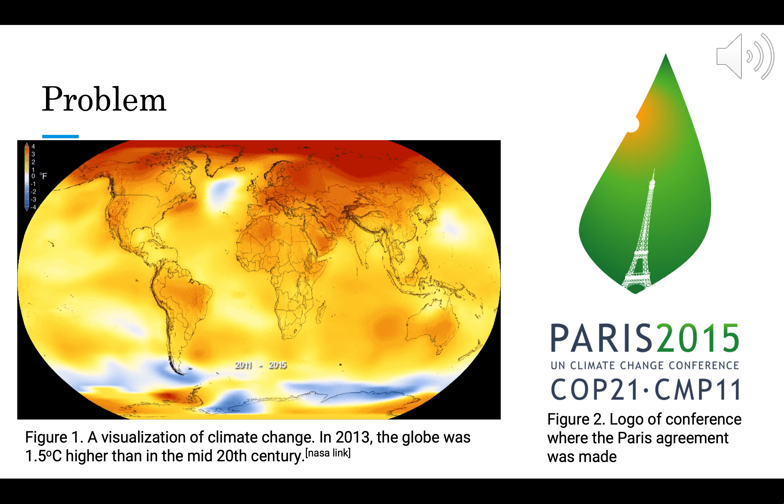Over the past century, humanity's net carbon dioxide output grew from 0 to 22 trillion kilograms per year. The massive growth of carbon dioxide output is due to the industrialization of society. This influx of CO2 is the main cause of global warming, acid rain, and the hole in the ozone. Our consumption of these fossil fuels far exceeds the natural production of these fuels, so eventually they will run out.

According to Shafi and Topal, the majority of fossil fuels will run out by 2042, and coal will only be available until 2112. At the 2015 UN Climate Change Conference, the Paris Agreement, negotiated between nations, set a goal to limit global warming to well below 2 degrees Celsius and reduce emissions to eventually reach zero emissions globally.

Hydrogen is a very appealing solution to alleviate our reliance on fossil fuels. It is a very versatile renewable energy source. Even the International Space Shuttle uses it as one of its main fuel sources. The direct use of hydrogen does not produce any carbon dioxide.

Recently, the hydrogen market has been expanding quite rapidly. The transportation industry has had growing interest in hydrogen-based vehicles. Toyota, Hyundai, and Honda all now produce fuel cell electric vehicles. Also, many fuel cell buses are being used in Europe, the US, and in Eastern Asia.

There are many different pathways to produce hydrogen, each requiring input of some form of energy to split molecules to produce hydrogen gas. Currently, the most common method in industry to produce hydrogen is natural gas steam reformation. It accounts for about 97% of worldwide hydrogen production. This is not a sustainable pathway because it produces carbon dioxide. Cleaner alternatives include biological and biomass methods, photoelectrolysis, and high temperature electrolysis, to name a few.

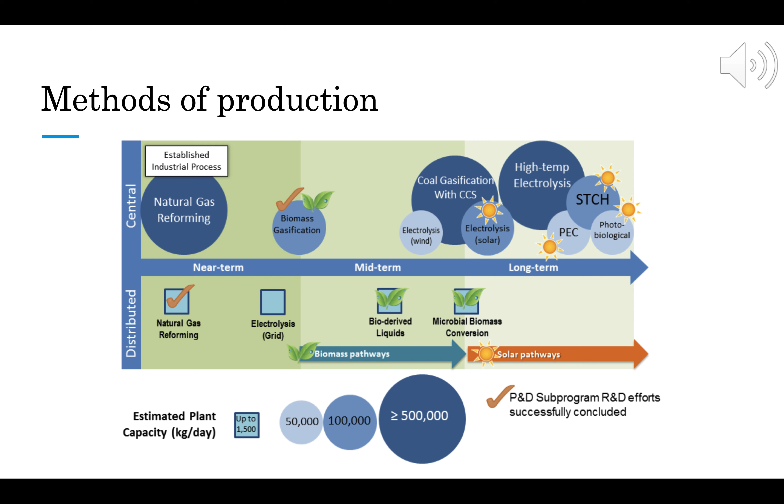Electrolysis is a technique that utilizes a current to decompose water into hydrogen and oxygen. It does this through an anode and a cathode, similar to a fuel cell. At the cathode of an electrolyzer, water uptakes the electrons and forms hydrogen gas and negatively charged oxygen ions. Oxygen diffuses through a solid membrane and reacts at the anode to form oxygen gas. There are many types of electrolyzers, but according to Back et al., oxide materials are best suited to be the electrodes. Although they are not as efficient, they are inexpensive and show great corrosive resistance.

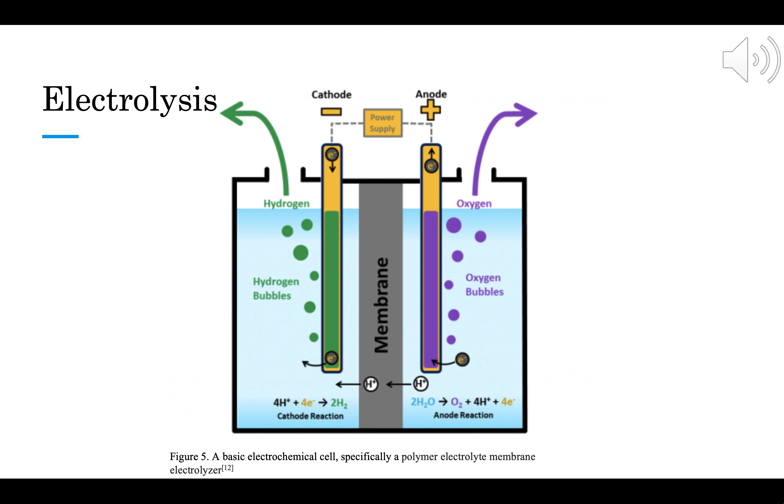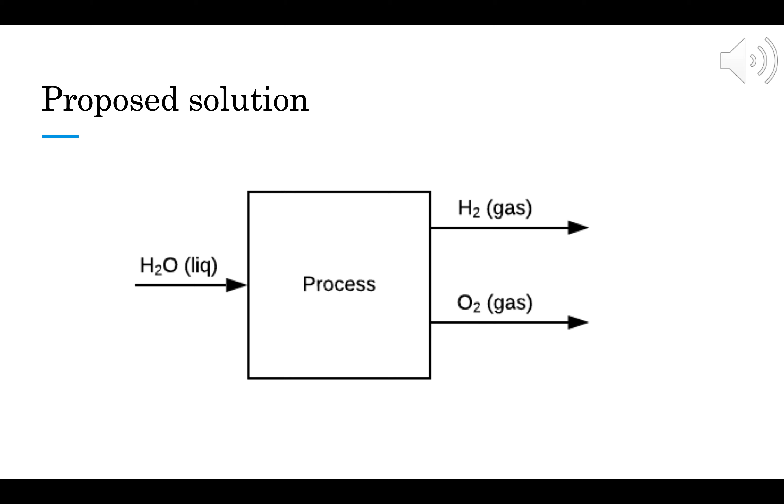The stack is made up of planar solid oxide cells similar to that used in the research study done by Carl M. Stoots et al. Production of this size would require approximately 1,840,000 kilowatt hours per day.

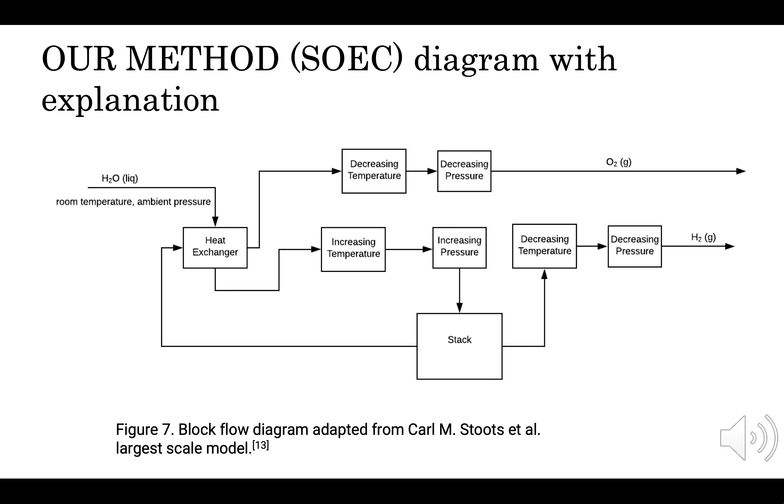In our design, we considered environmental and social impacts along with potential safety hazards. Starting with environmental impacts, if this process is energized by electricity produced by solar or wind power, it would have no greenhouse gas emissions. Assuming complete conversion, the only emission from the system would be oxygen, which will be disposed of in a safe manner.

This system requires about 450,000 liters of water per day to reach the desired production rate, and this is assuming complete conversion. This system is definitely not suited for a dry or drought-prone climate such as California.

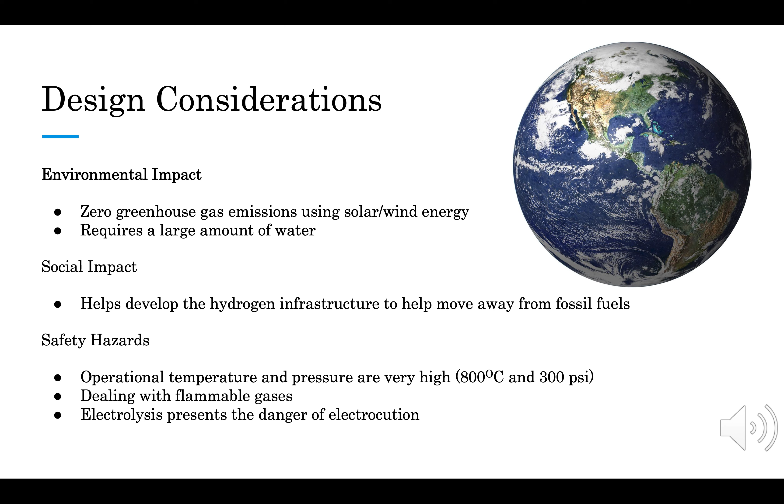In addition, if the system is built, it would be a pioneer in the hydrogen production industry. As stated before, 97% of all hydrogen is produced through natural gas reformation. This would help develop the hydrogen infrastructure, which would allow hydrogen-based technology to grow and ultimately lessen dependence on fossil fuels.

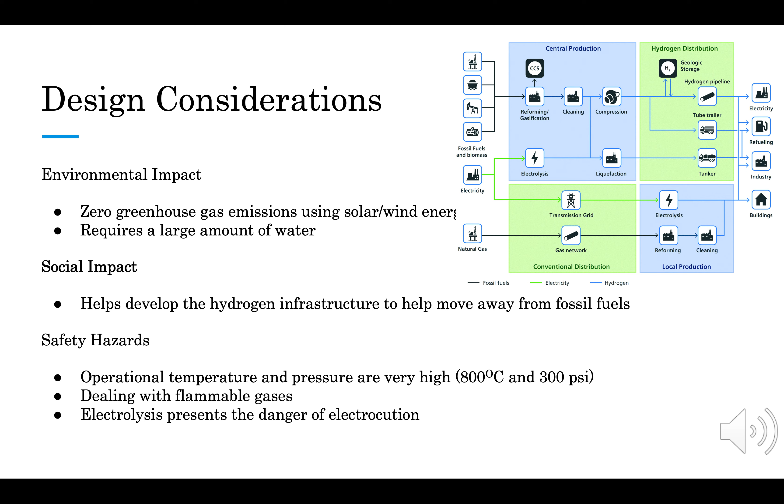This process will be operating at very dangerous pressures and temperatures. All equipment must be properly insulated and strong enough to withstand these conditions. Hydrogen is a very flammable gas and has to be handled and released properly. Electrolysis deals with voltage differences between electrodes. If technicians or engineers must be on site, they need to ensure that they have proper equipment to keep them safe.

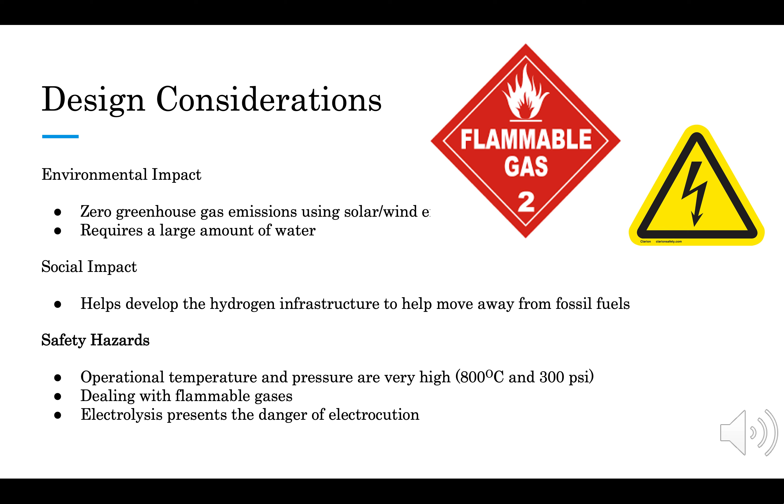Using a production rate of 50,000 kilograms of hydrogen per day, a simple material balance was done assuming 100% conversion to determine the rate of water that must be fed. Prices of $2.48 per kilogram of hydrogen and 17.7 cents per kilogram of pure water were used to calculate profits.

It was determined that the net profit per year for this process is $14,783,331. The break-even TCI was determined to be $147,833,317, assuming the return on investment is 10%. Calculations can be found in the attached documents.

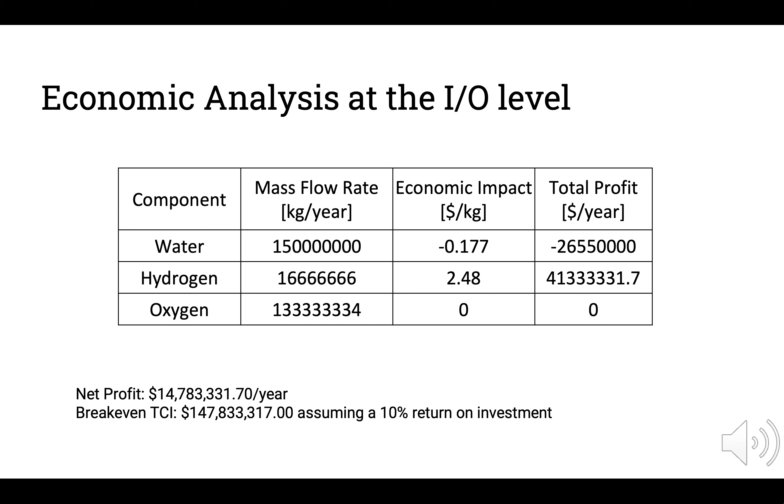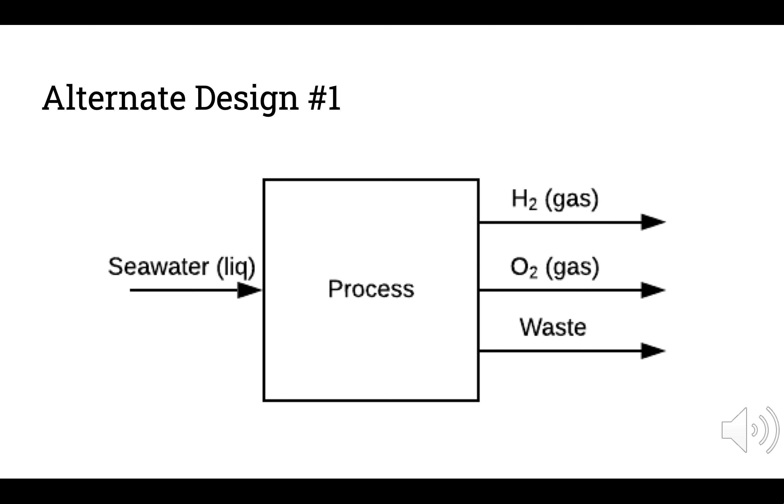In our first alternate design, instead of pure water, our system will have an input of seawater. The waste stream contains whatever particulates were in the seawater upon intake, such as pollutants, salt, and possibly even sand. Based on Stutz et al. research, our second alternative has two electrolysis pathways occurring simultaneously. Carbon monoxide and hydrogen are produced together, making what is known as synthetic fuel or syngas.

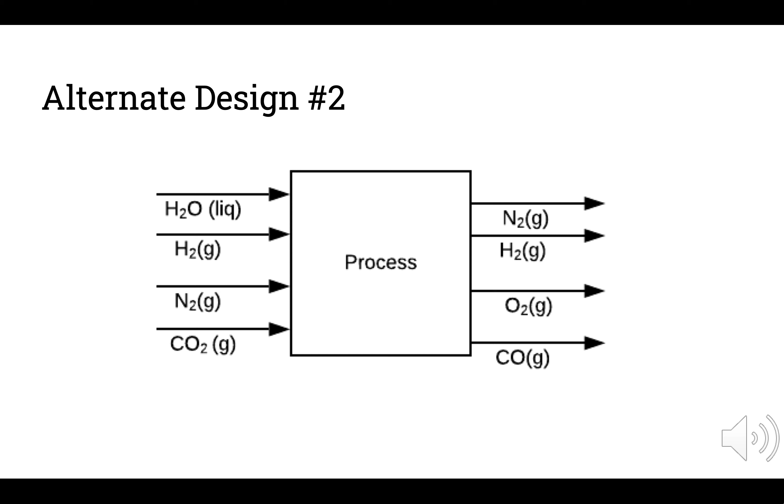Design alternative A was ultimately not chosen because the reverse osmosis is an energy-intensive and expensive process. The regular process alone is quite expensive, and adding on another energy-intensive process will make it undesirable.

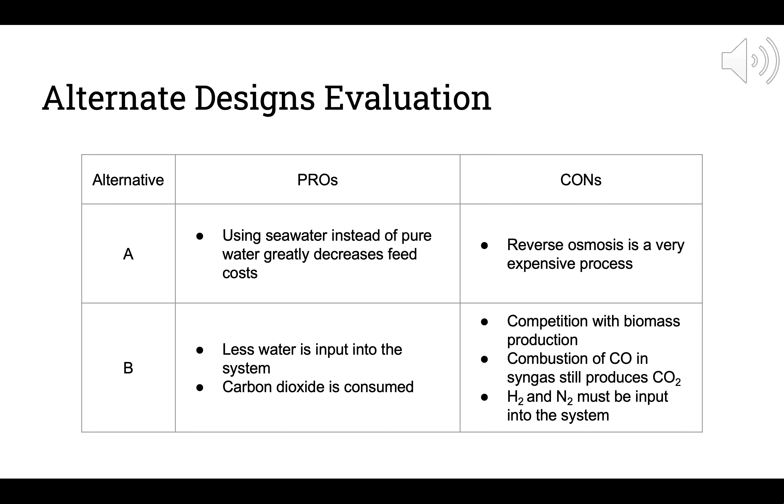Design alternative B was not chosen because production requires multiple gas inputs and deals with carbon monoxide, a very toxic gas. Further safety precautions will have to be installed. Since the capital cost of this system is already very high, this alternative is less appealing than the original.

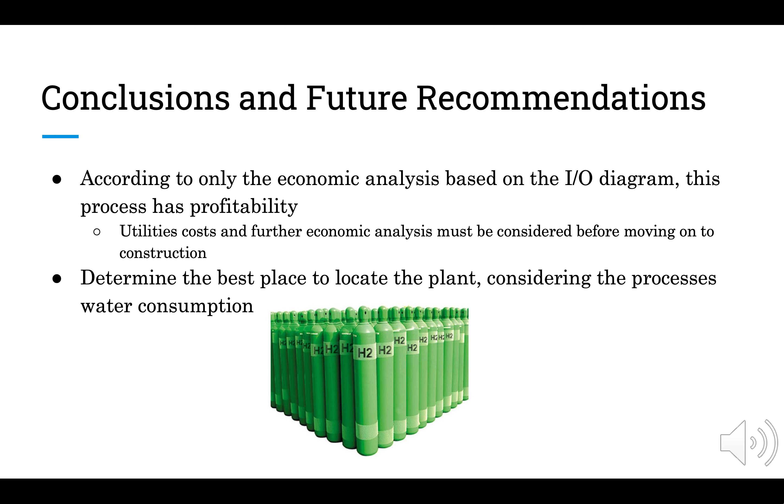According to the economic analysis done on the proposed IO diagram, the process proves to have profitability. However, it is important to do some further economic analysis to take into account the utilities and other capital costs, such as the electrolyzer unit, heaters, storage tanks, compressors, etc., that are required to accurately determine the profitability of this process. In addition, further research into making this process more energy efficient will be a priority to reduce costs and overcome these limitations for hydrogen production via electrolysis.